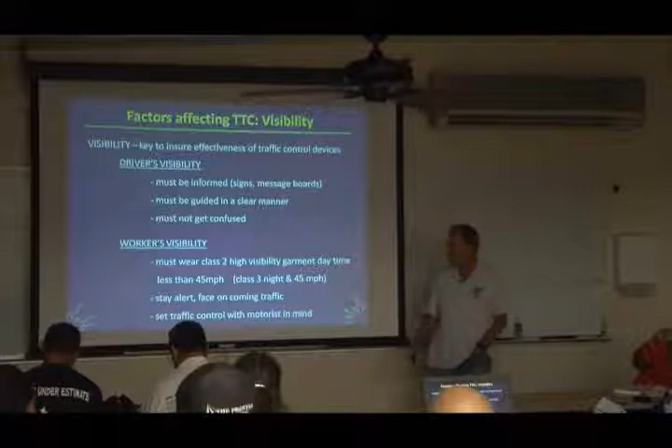Okay, you as the worker, keep yourself visible. Like we said before, you must wear a minimum of a Class 2 high visibility vest if you're working on the road in the daytime and it's under 45 miles per hour. Anything outside of that, working nighttime or where the speed limit is higher than 45, you need to wear a Class 3 vest. Basically that's just the amount of reflective material used to make the vest.

Stay alert, face oncoming traffic as much as possible. Now that's kind of hard to do - that's mostly when you set up the traffic control, but when you're actually working, what are you paying attention to, your work or the traffic? You've got to kind of look up, look down, but try to face oncoming traffic, especially when setting up cones and signs so you can see what's approaching you.

Try to set up the traffic control with the motorist in mind, meaning put things so that the unsuspecting motorist coming along would make sense of it - like where the signs are, you read it and have enough time to react. A lot of the traffic control we're dealing with is about giving the motorist the reaction time, the opportunity to see something, cycle the information through the brain, and make a determination.

For instance, why should a motorist slow down if you're only going to put one or two cones on the road? That doesn't look like high concern, yeah? But if you put a couple signs and several cones, maybe that commands their attention a little bit more. But where are you and what are you doing? We'll talk about that in a couple minutes.

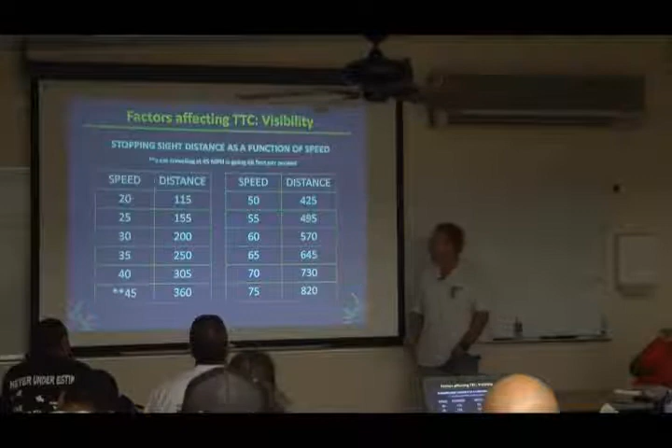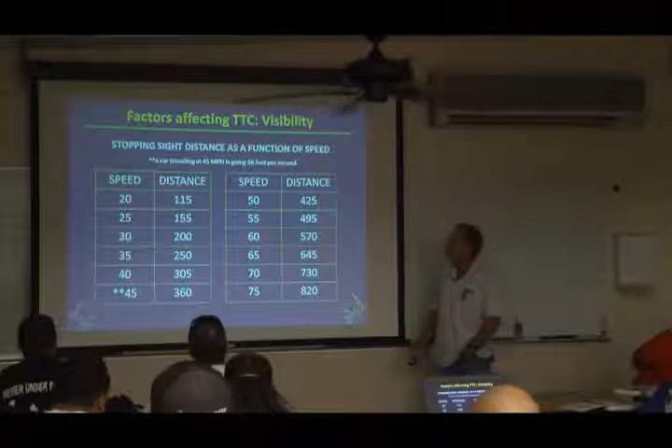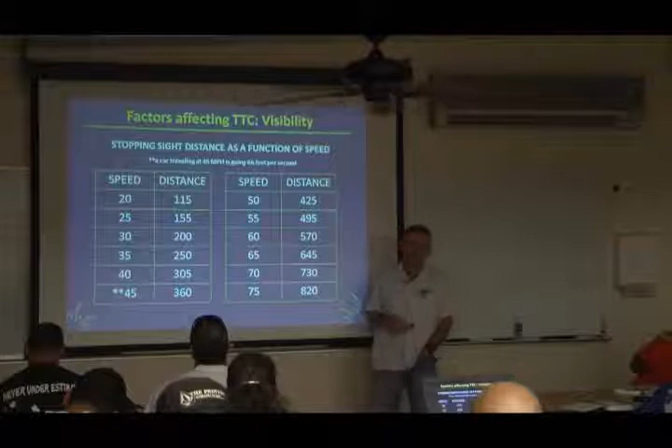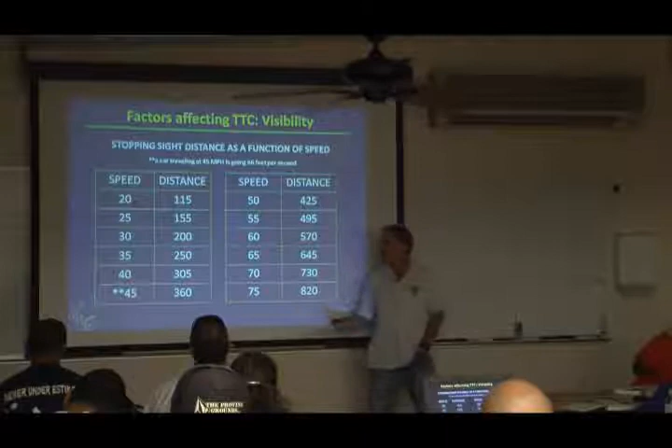Now as far as visibility goes, in the book there's the sight distance chart, and basically this tells you how much distance a motorist needs to see an object and react to it. Let's say, for instance, you're flagging. If you're a flagger on a road and you're in a 25-mile-per-hour work zone, between you and the motorist should be 155 feet of sight distance.

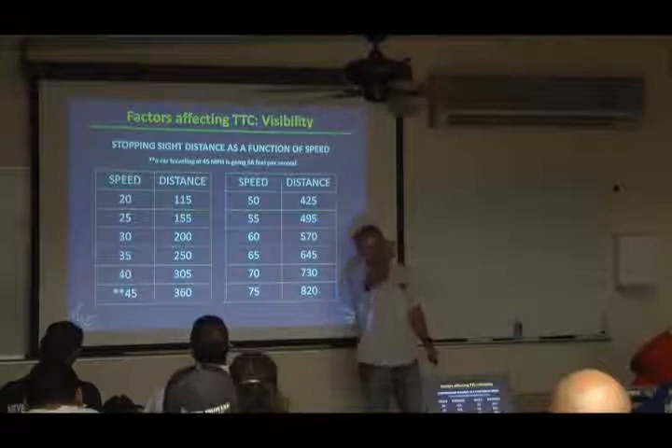So let's say you're in a 25-mile-per-hour zone, the motorists are driving along, and you're flagging, just as an example, and say you're on a curvy road. If you don't have at least 155 feet of sight distance with the car, chances are when you turn the stop/slow paddle to stop and tell the car to stop, they are not going to stop if you have less than 155 feet. So that's how speed and sight distance go hand in hand when working on the road.

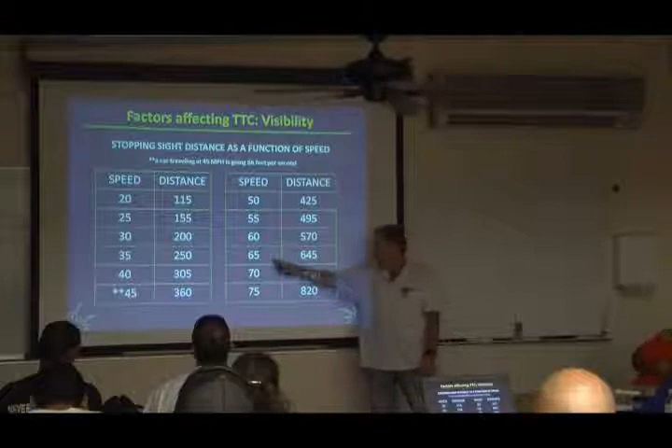We'll get to another chart pretty soon, it tells you how far to space the signs and so on. But as far as sight distance goes, even where you place the signs, the higher the speed, the further the distance needed. If they don't have the appropriate distance, they don't have the proper spacing, they don't see the signs, that sign is basically useless because the motorists can't read it. And if they can't read it, they're not going to pay attention to it. So basically, you're putting up a sign for nothing.

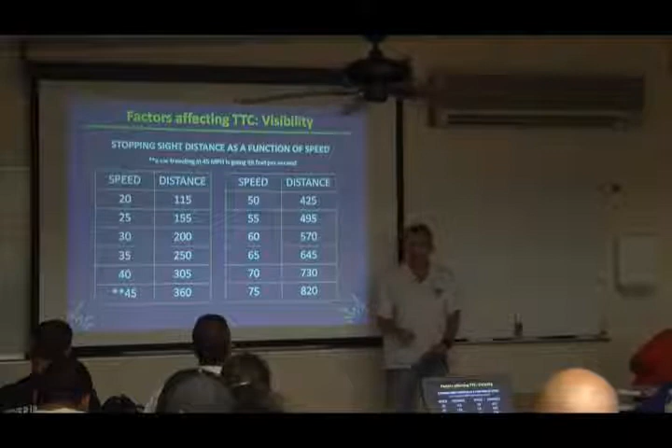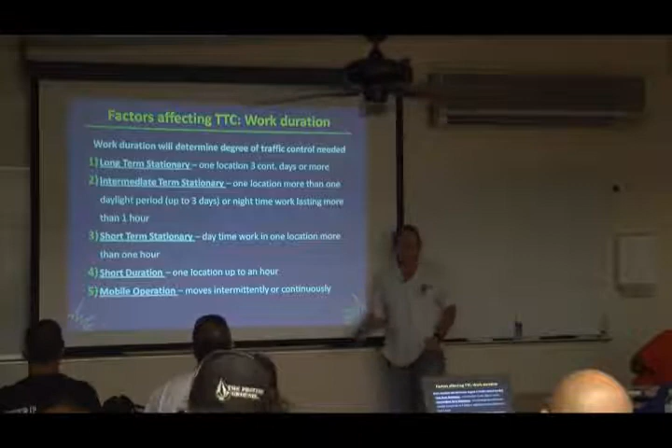Now I'll get into an example in a moment. This is kind of important what we talked about. Whether you're mowing and just shooting down the road, or let's say you're trimming a tree and you're going to be in one spot all day, cutting down a tree or whatever, you have different durations of work. And those durations of work will dictate how much traffic control you need to set up.

So the basic breakdown, there's 5 categories of duration. One is long-term stationary.

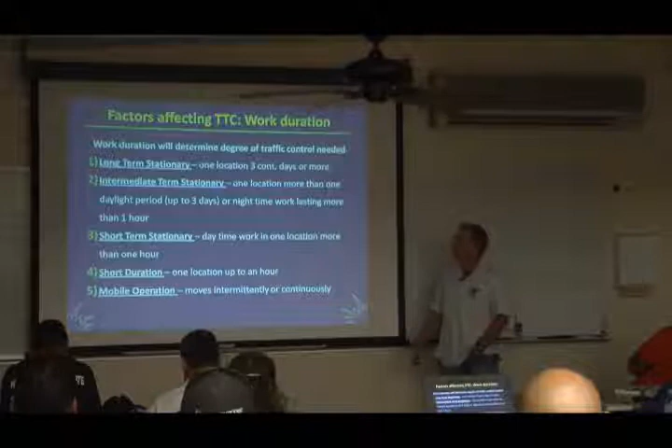This is the long-term stationary category, which involves full-on maintenance reconstruction projects where they stay in one location for 3 continuous days or more. We'll get into more examples of what each of these entail. The intermediate one is a location for more than one daylight period, up to 3 days. In other words, you go to the same spot every day for up to 3 days, or one nighttime period. A nighttime period is if you're out on the roadway at night for more than 1 hour, that would be considered intermediate stationary. I'll get to some examples of these as we go along.

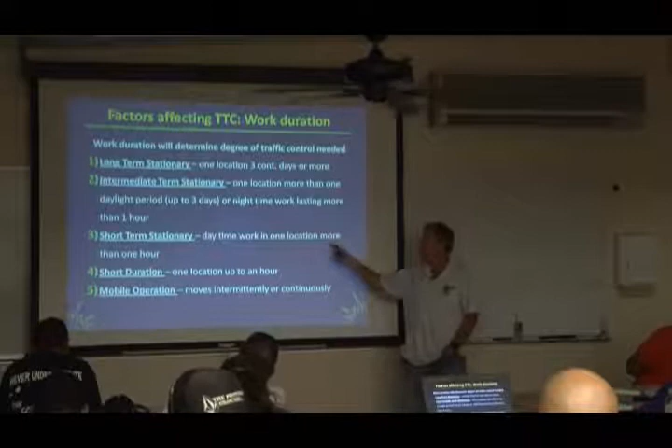Short-term stationary is the most common one. You work in one set location for more than an hour during the daytime. A short duration is in one location up to an hour, then you move. And mobile operation is just moving along.

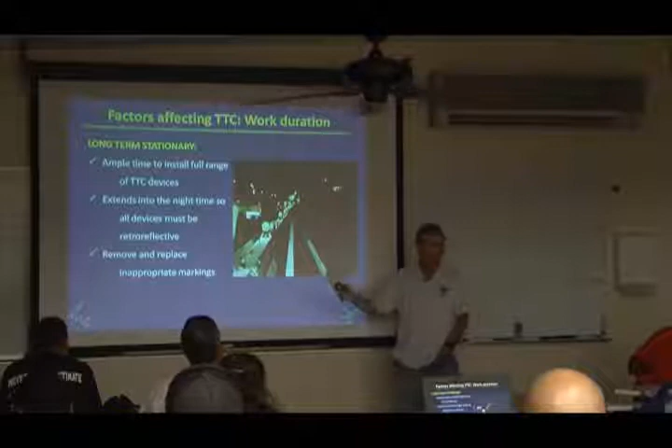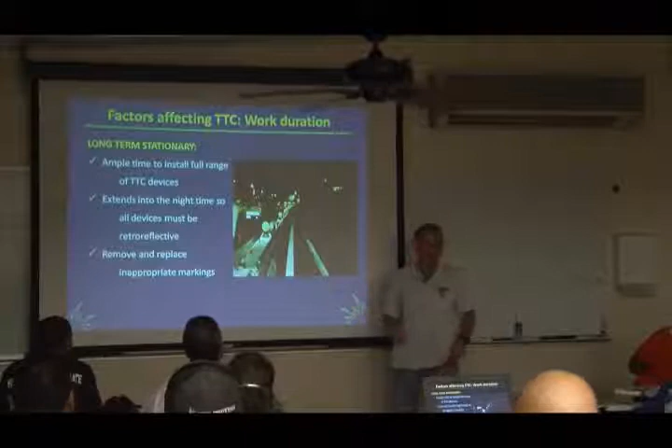On the long-term stationary, you know you're going to be there a long time, like I said, 3 continuous days. That's when you got to start setting up barriers, maybe do restriping, and everything has to be reflective. That's one of those that takes a couple days to set up because you're going to be there day and night, and you go through all that effort because you're going to basically reconfigure the roadway. If you're working in a location for a long-term duration, you need to go through more steps to protect the motorist. Long-term is when they set up everything, restripe, put up all the additional signs, everything.

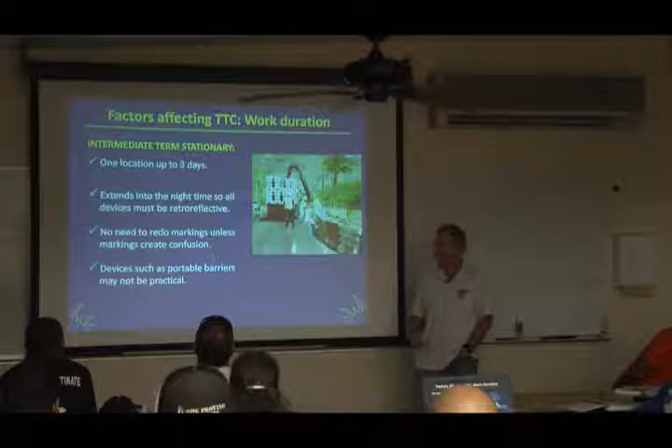Intermediate stationary, you're in one location up to 3 days. It might extend into the nighttime, so you want to make sure your devices are retroreflective - cones on your collars, signs with reflective sheeting. Typically you do not need to redo the striping, unless the motorists are confused or what you're setting up is going to conflict with the existing striping. But again, that's something an engineer would have to figure out. Pretty much that stuff you guys wouldn't have to figure out.

Devices such as portable barriers may not be practical. You're not going to go through this much effort to set up a work zone if you're just going to be there during the day and leave, come back tomorrow, and leave. If you're just going to work on the bridge rail a couple hours today and come back tomorrow, you're not going to go through the effort of blocking it off. But if you're going to completely remove the bridge rail and be there for a couple weeks to replace it entirely, then you're going to go through that extra work. So it depends on the work you're doing and how long you're going to be there.

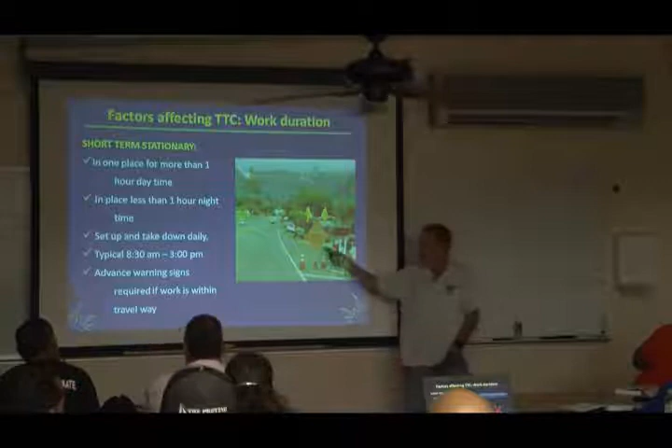This is probably the biggest problem I see with a lot of the maintenance type work. A lot of guys figure we're only going to be there a couple hours, so they don't put up adequate signs, they don't put up adequate cones. When you talk to a lot of people, guys like you and me, there's two reasons they don't put up the signs. A, they get sent out on the road to do something and they don't have the proper equipment. Or B, they haven't been trained and they don't know.

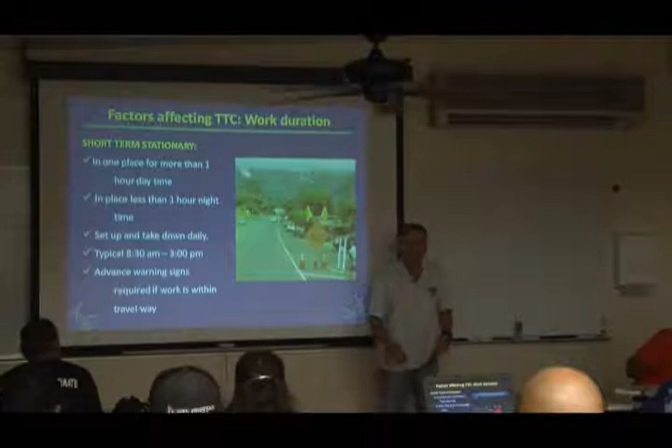So if you don't have the equipment, no matter what I tell you today, you pretty much can't set it up. This is where sometimes I get into trouble with supervisors, because I teach these classes and tell you guys, hey, you got to have these signs, you got to do this. You go back to work tomorrow and the boss tells you, hey bro, just go. Oh yeah, but the guy said...

You know, what are you going to do, right? That's where classes like this are put on, so hopefully everybody gets on the same page. The idea is for you guys to go home at the end of the day safe, come to work in the morning, do your job, go home with no problems. But that's where the conflict comes in, where you get told to go do something but you don't have the right equipment. Or you got the right equipment, but you figure, nah, we just hurry up then we go lunch. Kind of hard too, that way.

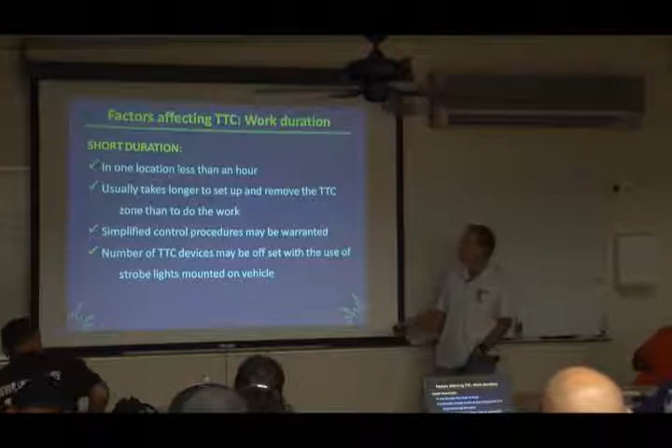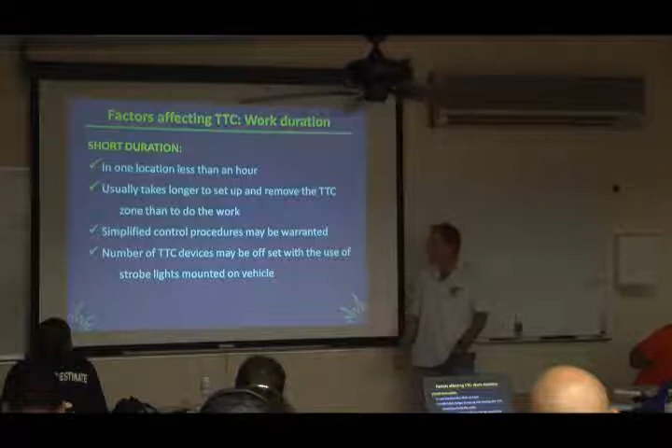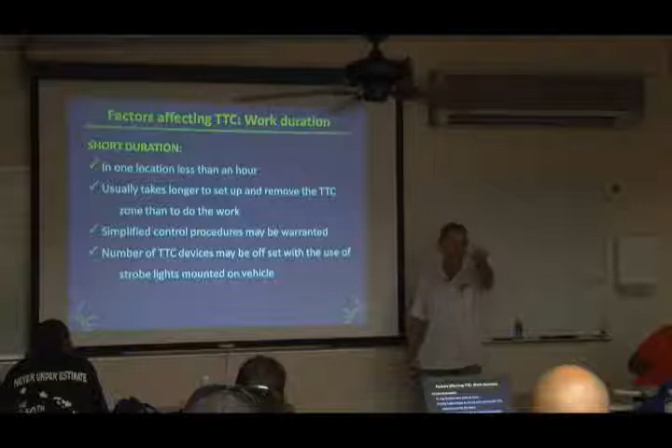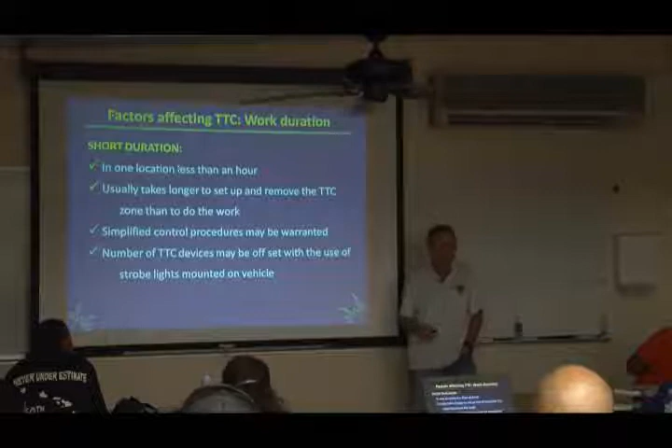Okay, so short duration: in one location, less than an hour. Sometimes it takes longer to set up the traffic control than it does to do the job. That's when you can simplify your procedures and the number of traffic control devices you need might be reduced. Like for instance, if you're doing lawn mowing on the side of the hill, you'll be in one spot, then you move down. Maybe you put up a simple road work ahead, shoulder work ahead sign, and just move along with a strobe light on the truck. Short duration, less than an hour in one spot, you just kind of move along, so that type of stuff is allowed. And again, it depends on how long you'll be there and visibility.

Because if the work is off to the side, basically you just want to give the motorist a heads up that something is there. A lot of accidents at work zones happen because motorists drive along and there's no signs to tell them. All of a sudden they're like, oh, what's up? And their attention is diverted.

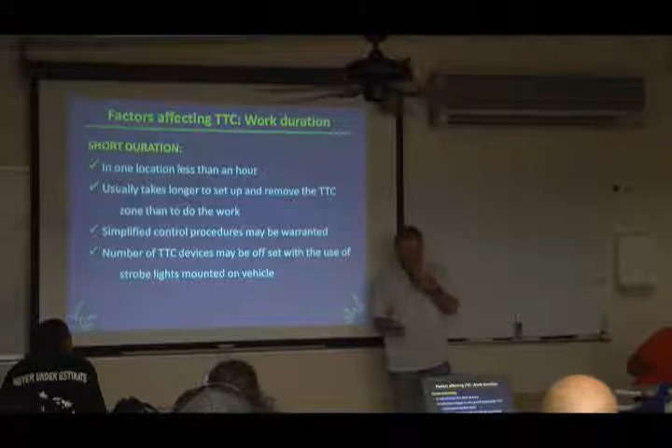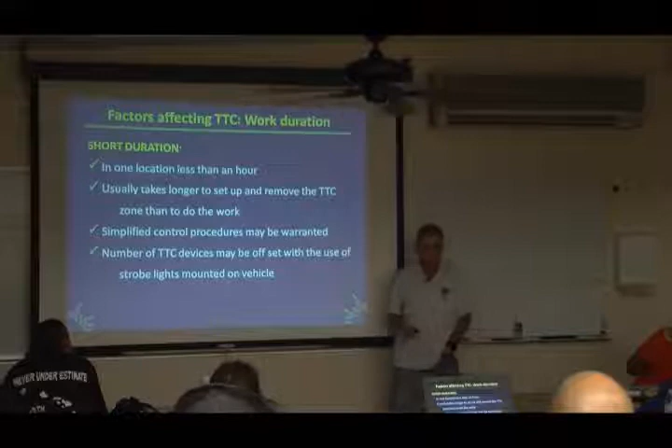What's another reason to put up signs, even if you're working on the shoulder, a little bit off to the side? Maybe pedestrians, bicyclists - it depends on where you are. If you're on, say, Kamehameha Highway instead of H1, you let them know, maybe they might want to think about going to the other side, keeping bicyclists or pedestrians safe. You got to think about where you are and who is affected by your traffic control. Remember I talked about the principles - we're not just concerned about motorists. If you're doing a weed whacker, do you want pedestrians walking right next to you? Well, maybe you do, but maybe you shouldn't, because they're going to get hit with flying debris. But is the pedestrian supposed to know that? Maybe not, you know.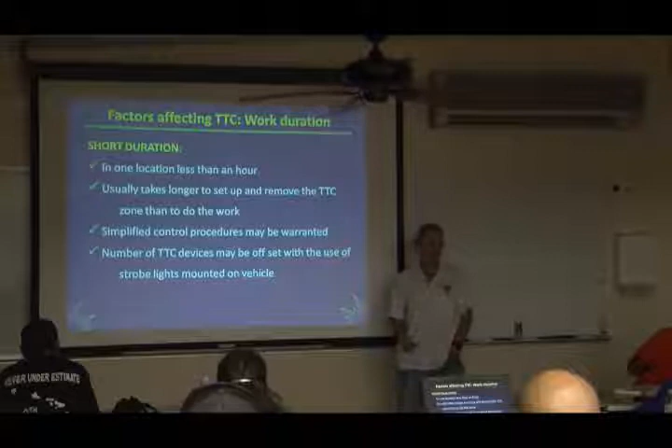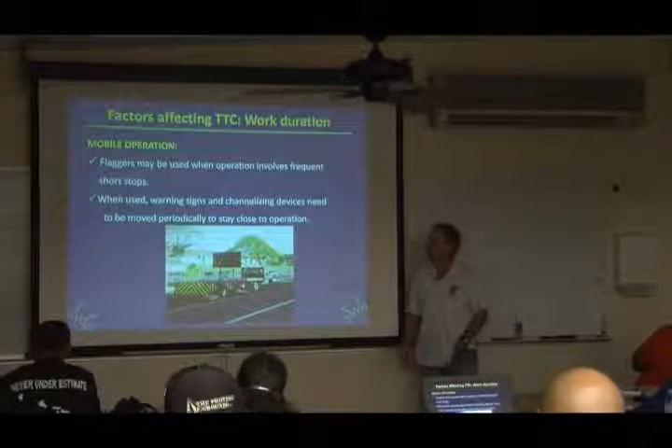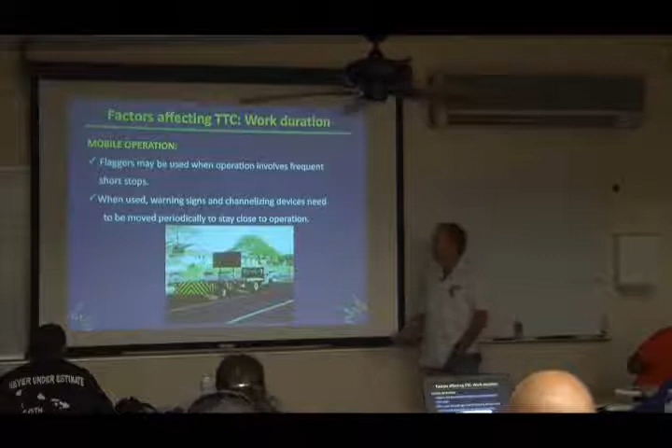Okay, and then finally, mobile operation. Flaggers can be used for mobile operations, provided they set up the proper advanced warning signs. Warning signs need to be relatively close to the work area if they are going to be used. And you cannot put up shoulder work ahead, road work ahead, start working here, and end up 8 miles down the road - those two signs back there mean nothing, really.

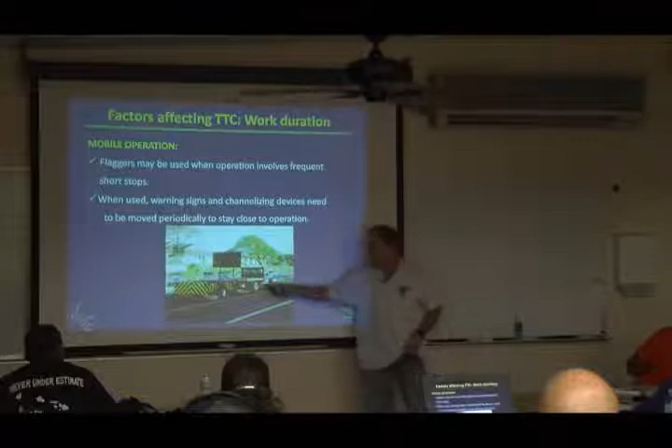But like for mobile operations, that's where we have this truck-mounted attenuator. We use stuff like this a lot for pothole patching. We just go down the road with the flashing arrow board on top, sometimes with a police escort. We use this on the freeway when they do pothole patching. If an automobile crashes into this truck, that attenuator will keep the driver from getting killed. That's a total mobile operation.

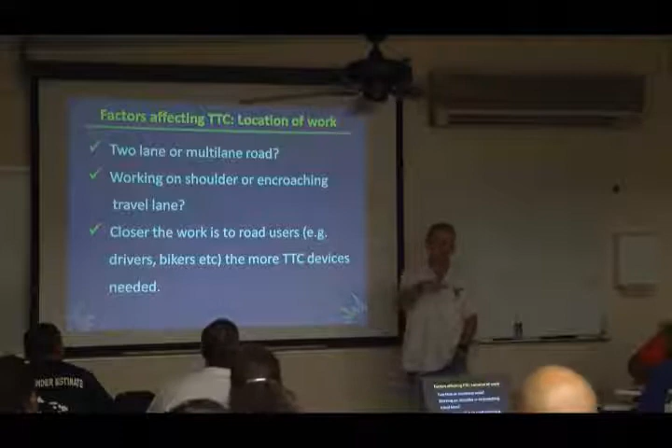Okay, so going back to the factors affecting traffic control: Is it a 2-lane road or a multi-lane road? Are you going to be working on the shoulder, or are you going to encroach into the travel lane? For sure, if you're going to go into the travel lane, like say you got to work on the right lane, for sure you're going to put up signs and cones.

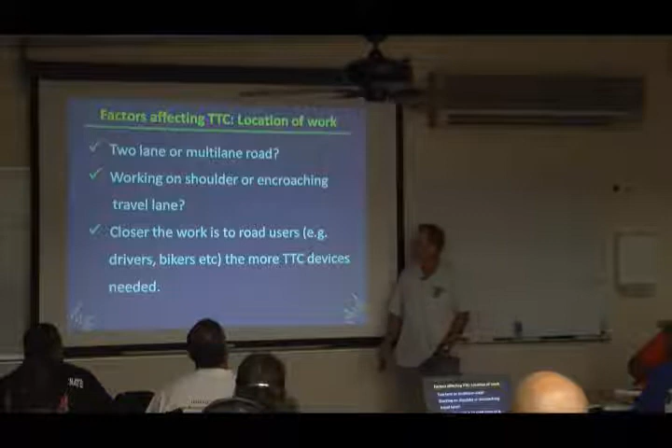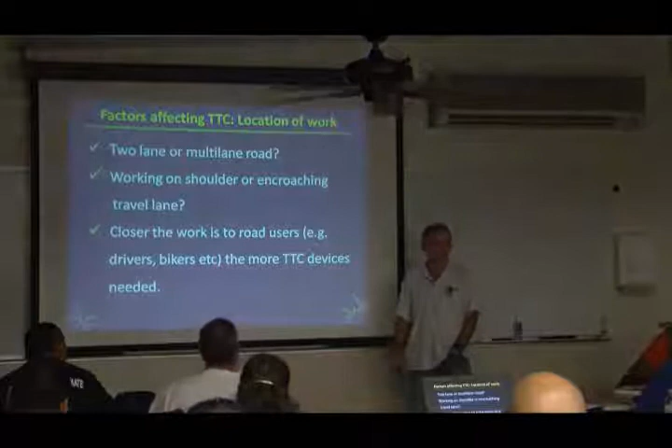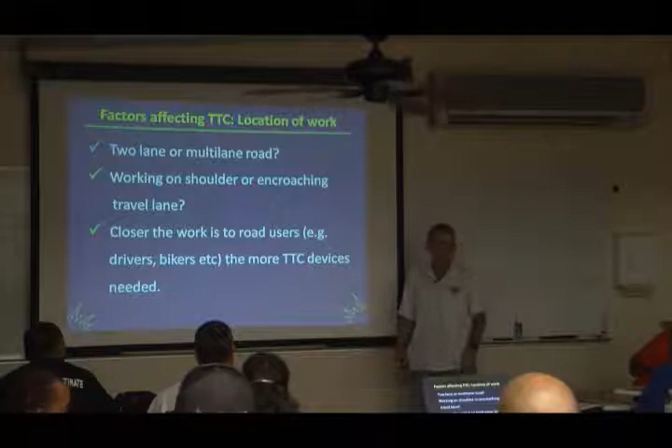But some guys, they don't. You'd be surprised - I've been doing this for 30 plus years, and I'm surprised there's not more people killed on the highway with their disregard for proper traffic control. Guys choose not to set up signs. They put 2 cones across the road and expect cars to be able to merge - they call that a taper. Speed limit 45, merging cars, no arrow board. I am totally shocked that there's not more deaths on the highway than there is now, because I see a lot of guys cut corners - good enough, no need, we're only gonna be here a short time. Hurry up, probably go. Or the boss sends you out and you don't have the stuff to do the job yet. But hopefully through classes like this, the word will get out.

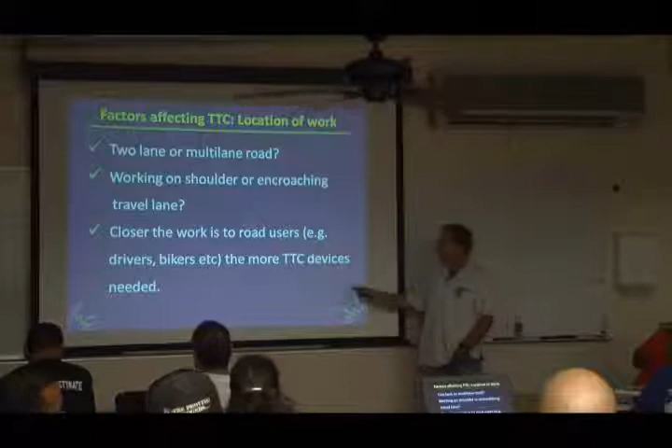The closer the work is to the road users, like bicyclists and pedestrians like we talked about, you should use more traffic control devices as well.

Okay, so what is a traffic control plan? Basically, it's anything that communicates to the people involved what you're going to do with the traffic control. There are a lot of typical diagrams, and this information is available in all sorts of places. A traffic control plan is something you can draw up. Like say your boss tells you, hey, you got to go work here. You guys talk about what you're going to do with traffic control. Draw something on a sheet of paper, make sure you understand what you're talking about, make sure you have the right equipment. You can share that with the crew and say, here's what we're going to do.

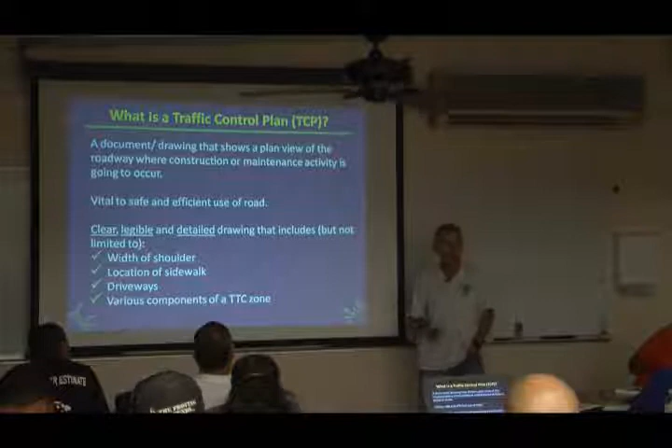Sometimes, and this may not really apply to you guys, when jobs go out to bid to contractors, the blueprints that come with the job have traffic control plans drawn, showing how the contractors are supposed to set up the traffic control. That would involve what signs are needed, what time they can work, where they can work, how many cones they have to set up. Very, very detailed, and that's drawn up by an engineer and approved through the bidding process.

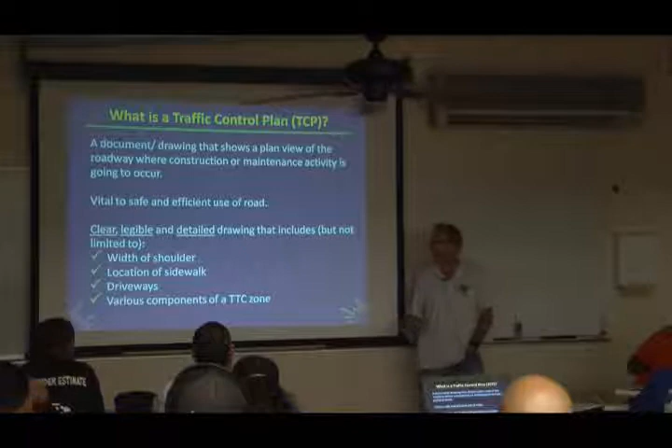Then you have the Manual on Uniform Traffic Control Devices. For state highways, when these jobs go out to bid, they also have the special provisions, and in the special provisions is Chapter 645, which talks specifically about traffic control. A lot of the information in this manual is based on that Section 645 of the special provisions of the DOT. So we took some of the information from the Manual on Uniform Traffic Control Devices, which is the federal manual, plus the better parts of Chapter 645, to make the information that's available in your book right now.

So when you have to draw a plan, you want to identify everything that is involved: understanding the width of the shoulder, locations of sidewalks, where driveways are, and what the different components of the traffic control are, where you're working, and why you need to block the lanes you do.

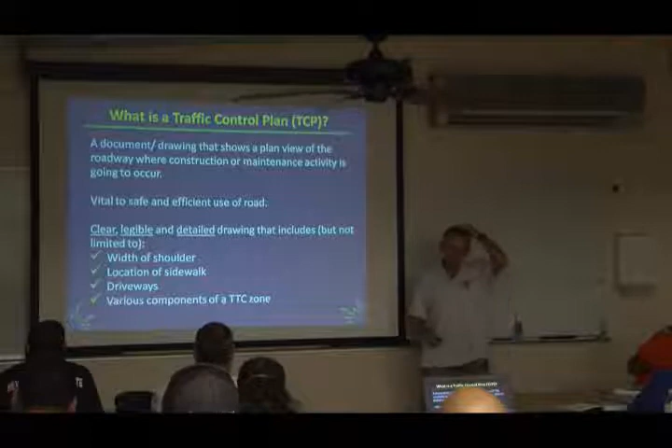One of the problems guys have when I put on these classes: if I tell you you're supposed to put up signs 250 feet apart, you go along and measure 250 feet. First sign goes here, 250 feet away from that there's a driveway. If it's 250 feet, do you have to put the sign in the middle of the driveway? Or do you have to put it before or after? Well, common sense is you're not going to put the sign in the driveway. But if you put it before the driveway, now you don't have 250 feet, right?

The reason I bring that up is, as we go through some of the charts coming up, it's going to give you specific information. For this speed, you must set the signs this far apart, boom, there's a number. All of that information, sign spacing, taper lengths, buffer spaces, cone spacing, that is guidance. That is not a hard set law that cannot be deviated from. Traffic control is a very complex thing.

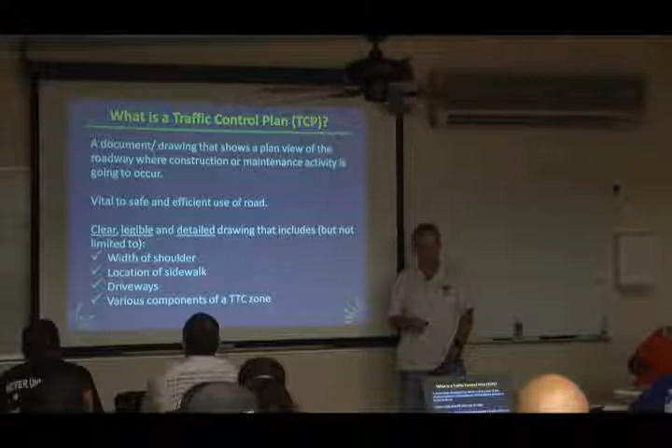You were negligent in your duty to put up the amount of cones that was required. So there may not be a law that requires you to put the cones 25 feet apart, but through the guidance, you should put the cones 25 feet apart so that you're not negligent.

That's a subject we can talk about for a couple hours, but I want to bring to your attention that when you're out there working on the road, as a responsible individual, part of your duty is to keep the motorist safe, to keep the pedestrian safe, to keep your work crew safe, and to keep yourself safe. And that's by following the guidance that is given to you.

Now, if you're asked, why didn't you put the cones 25 feet apart? And you say, well, in that area we put them 30 feet apart so our truck could pull out. Is that reasonable? Yeah, kind of makes sense, right? Maybe the cones were too tight to let the truck pull out, so you guys left a 30-foot gap instead of 25 feet. Good judgment, reasonable. People can understand that.

At least you have a reason why you did it. Versus saying, oh, we put them further apart because we didn't have enough cones. That's negligent, versus doing something like going back to my 250-foot spacing with the signs.

Why didn't you put the sign 250 feet away? Well, because I was in the middle of the driveway, so we put it on the other side of the driveway, and now the sign was 260 feet instead of 250. Is that reasonable? Yeah, that's reasonable, right? So there's a lot of flexibility in how you look at traffic control.

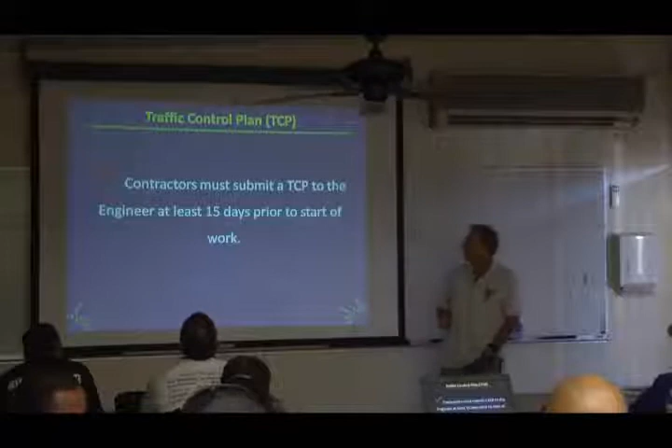For you guys, the workers, yeah - you go out there, you look where you're going to work, and you guys decide how best to control the traffic where you're going to work. On site, you make your own plan. You guys are not contractors.

Okay, I'm going to try to speed this up. I know you guys are getting bored, yeah? But this is good stuff, and you guys should try and understand this. Basically, in any traffic control, there are 5 components.

You have your buffer space as part of your activity area, your buffer space and your workspace. The buffer space, that's a dead area with nothing in there, used as a recovery area for vehicles that just don't quite merge and need a place to go so they don't crash. So that's the area before the work actually starts, where if the motorist doesn't quite merge properly, they can pull in and stop before banging into something.

The workspace, that's where everything happens, from your first piece of equipment to your last piece of equipment, or where you're working. And then, of course, your termination area, your termination taper, will let the motorists get back to their normal path. No matter what you're doing - flagging, closing one lane on the highway, two lanes - these 5 components will always be there.

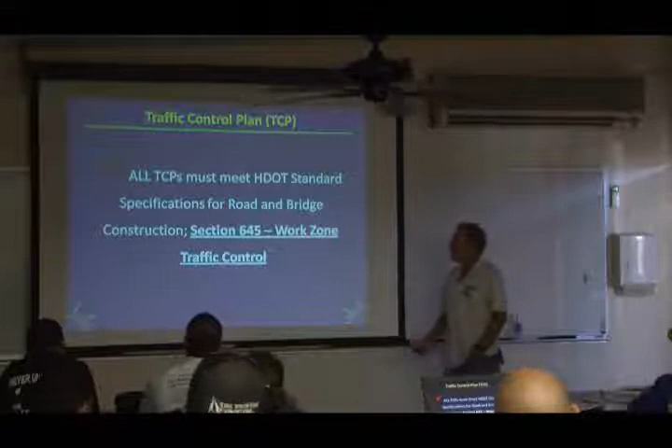All traffic control plans must meet the DOT standards, basically that's the 645.

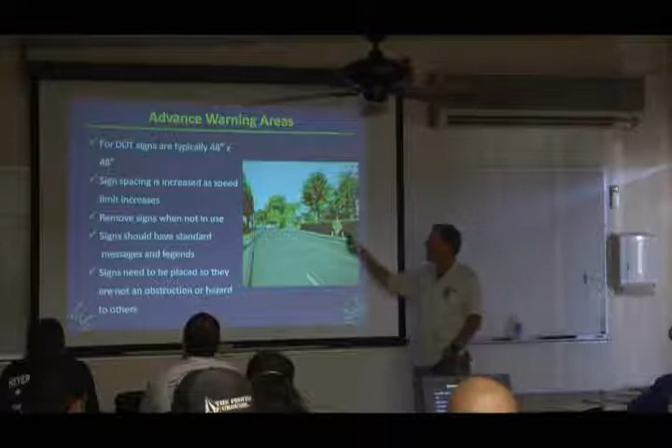Talking about advanced warning areas, typically we use 48 by 48 signs. A lot of times my company will use 36 by 36 inch signs when we work in residential areas, downtown, Waikiki, congested areas where there's not much space to put signs, we'll use a smaller sign. Typically you guys will use the 48 by 48 inch signs.

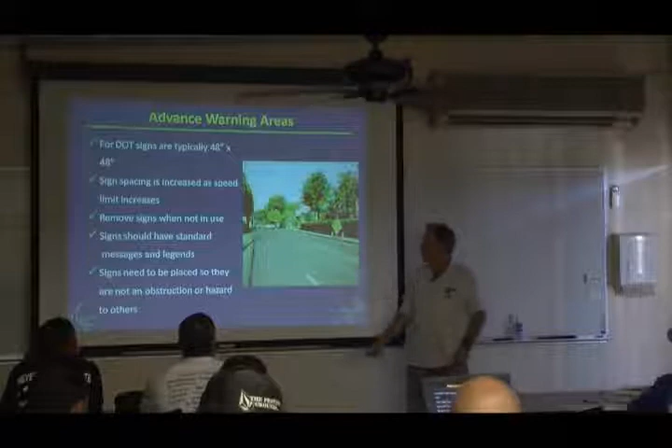Obviously, and when we get to the chart you'll see it, the sign spacing will increase as the speed limit goes up. For 25 miles per hour, a couple hundred feet apart. If we're on H1 freeway, signs that close would be totally useless, it'd just be a blur. Roadwork, something else, bye - you know.

Remove signs when not in use. Why is that a good idea?

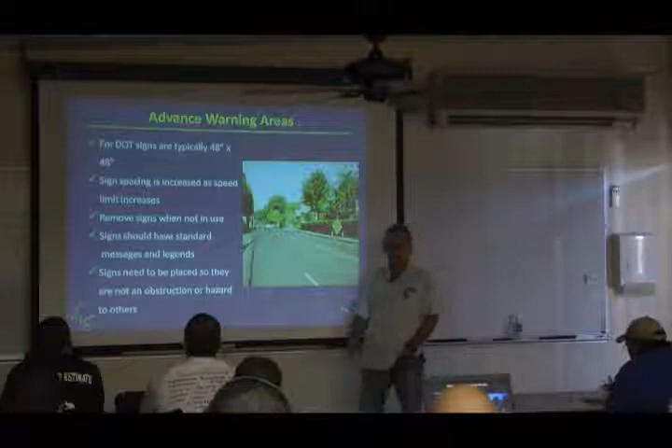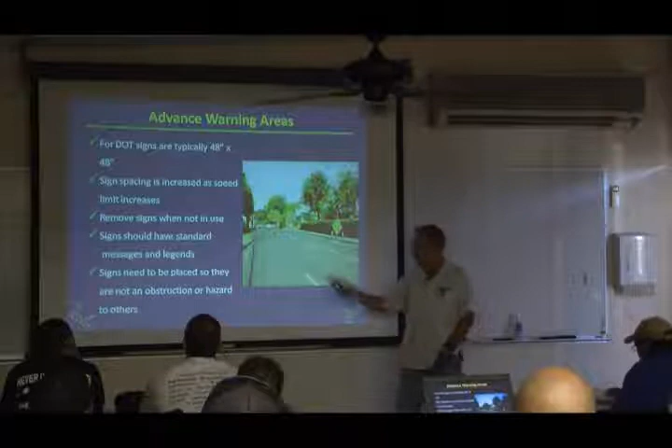You don't want to confuse the drivers, you don't want to give them false information. You know the story about the boy who cried wolf? People see signs up all day long, every day, and nobody working. Eventually the signs mean nothing, right? And that happens a lot. That's why motorists sometimes ignore signs - they see it, nobody working, the sign will mean nothing. We don't want to train motorists to ignore signs. So just put them up, use them. When you're done, take them down. And the signs need to be placed so they are not an obstruction or a hazard to others.

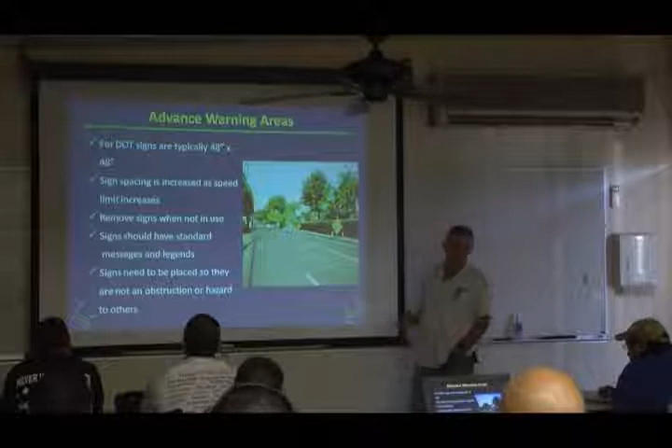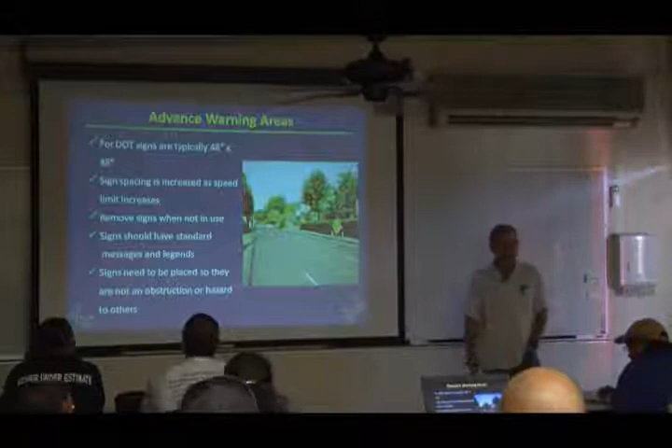That's why I chose this slide. What is the potential problem with that sign where it's sitting right now? Pedestrians, yeah? If you're a pedestrian, where are you going to walk? In the road. Is that a good idea? Not really.

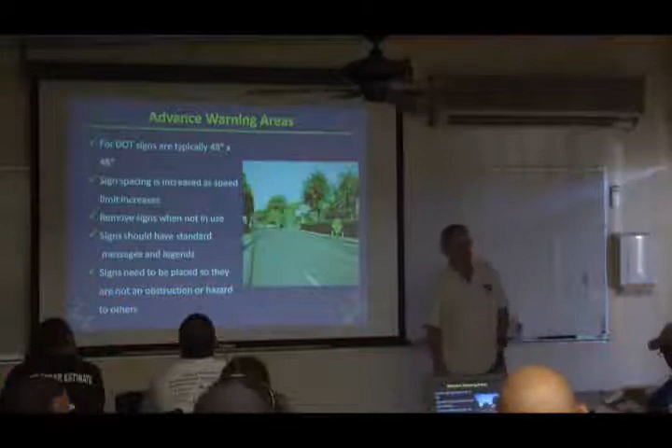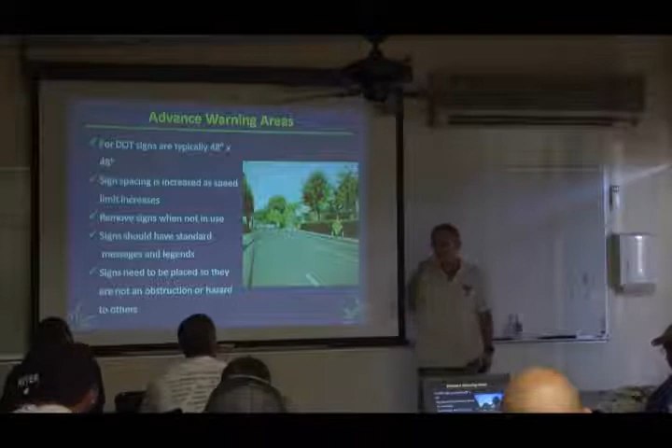So that's some of the stuff you're going to encounter when you're out doing traffic control - where am I going to put the signs? Like in Maui, we had a job on Hana Highway, and we had to put all the signs on the makai side because that section we were working, it was a cliff, road, guardrail, small shoulder, then more cliff. There was no way we're going to put signs on the right side of the road, on the mauka side. So we put all the signs for traffic heading out on the opposite side because that was the only place to put the signs. Our choice was put them on the opposite side or put nothing.

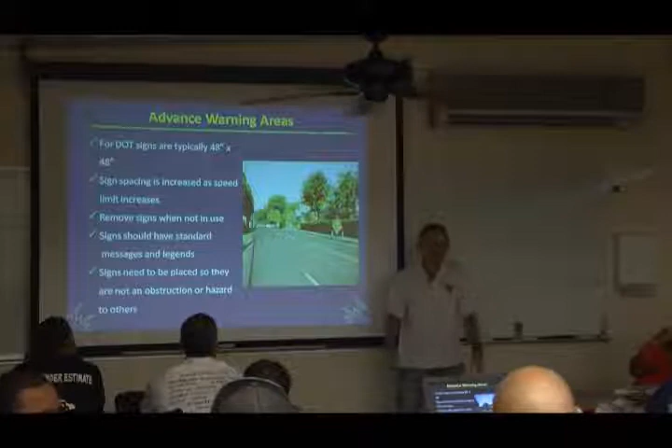We had to do what we had to do, and you're going to face that all the time. How did it work out? Nobody died. Fortunately, on that highway it's about 15 feet wide, cars are doing 15 miles an hour. That's in the worst area where only 2 cars cannot pass at the same time. So it wasn't too bad.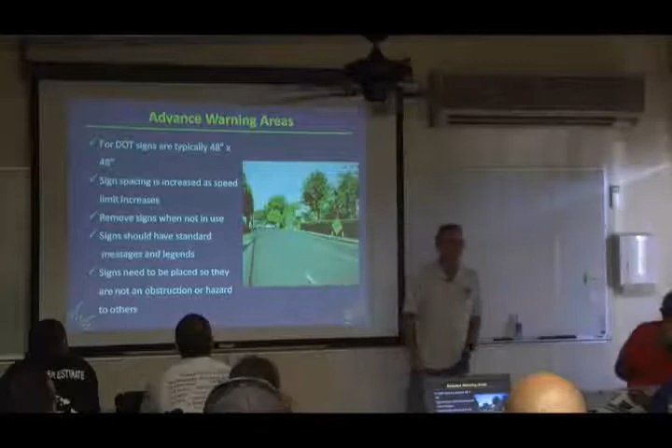So in this situation, what would you do? You're going to have to do like we did and just hope for the best with the pedestrians. Because what's your biggest concern, the pedestrians or the motorists? There's more motorists that pass. If this was a high pedestrian way, they'd probably have a paved walkway for the pedestrians, maybe a cement sidewalk or something. But with 1 or 2 pedestrians, hopefully they're smart enough to figure it out. But this is the kind of stuff you're going to be faced with a lot.

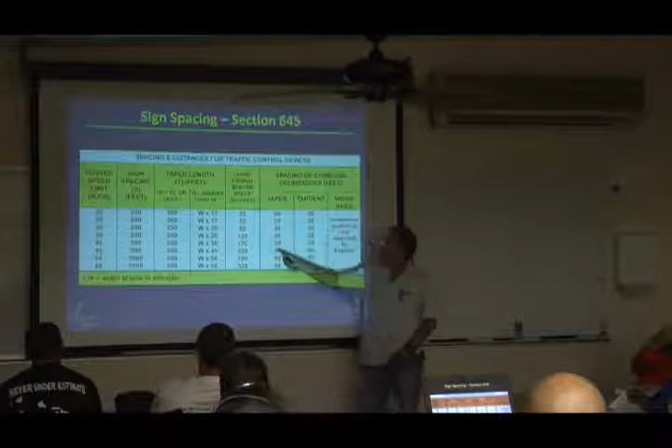And as you can see, the tapers get longer, the buffer space gets longer, the channelizing devices get longer, the spacer gets wider. But as far as sign spacing, this is your basic information.

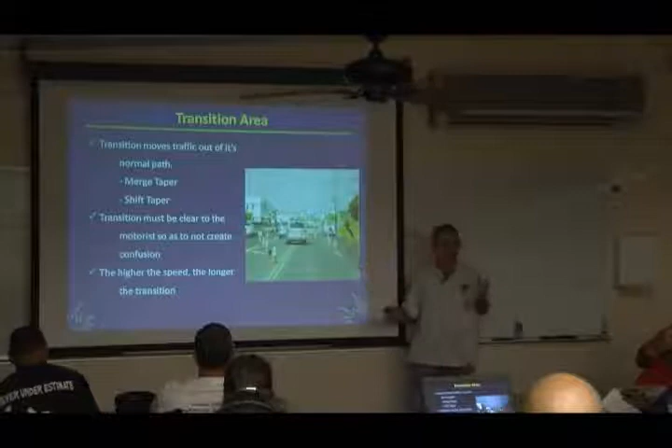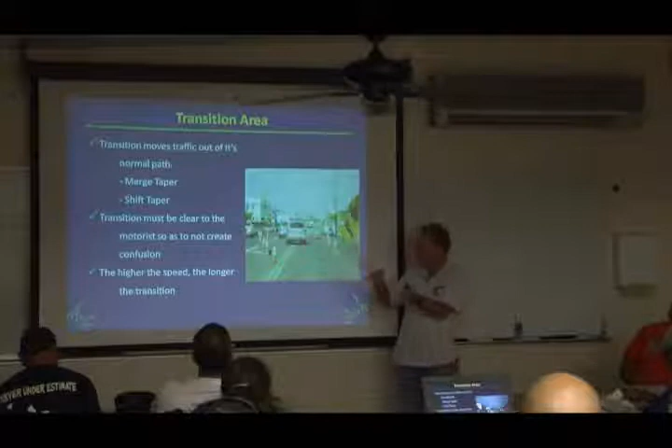Now, we talked earlier about don't set up traffic controls that are confusing. When you start shifting traffic around and you have driveways and multi-directional areas with intersections and stuff, it can get confusing - sometimes motorists get a little confused. You got a sign right here, then this little taper right here that's shifting cars over. This is a transition, basically you're shifting cars over. The reason this looks like this is because right behind this sign you have a driveway, and going up further ahead you've got an intersection. So traffic control can be confusing depending on what you're doing.

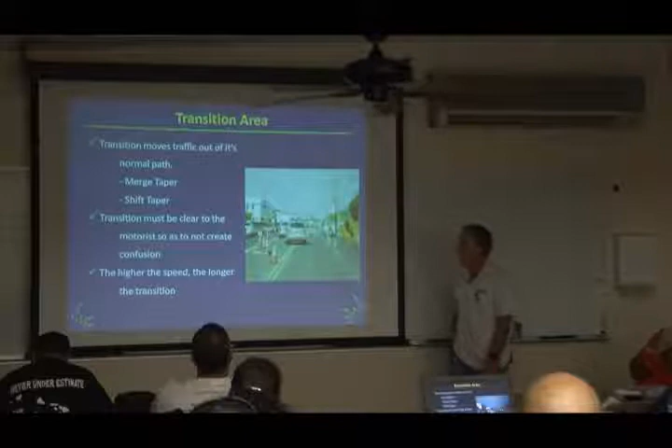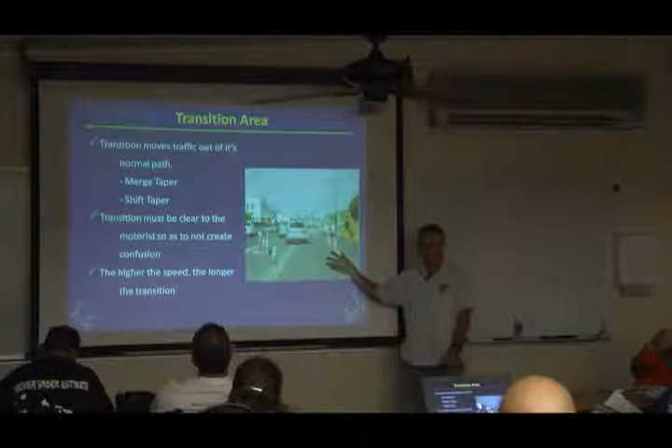You try to make it as clear as possible. Again, because this is in a slow speed area, 25 miles an hour, these tapers look relatively short. But you can tell we've already merged the traffic over from the right lane into the left lane, and now we're just pushing them onto the opposite side of the road.

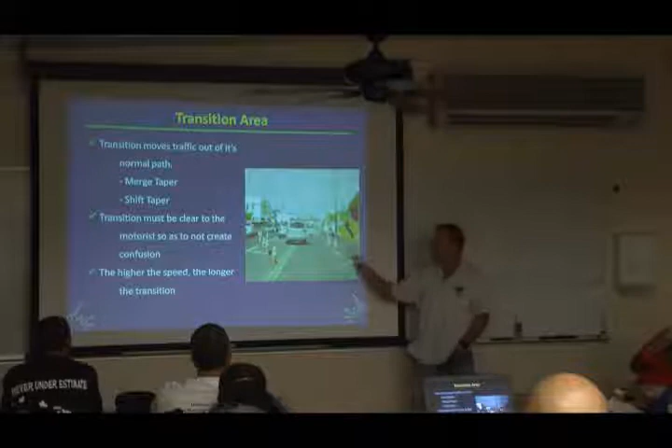So they're already down to a single lane, they're already kind of slow, now we're just guiding them along. But when you do traffic control in areas that have multi-direction driveways and stuff, it does get a little confusing. Like I said earlier, you try to set it up from the driver's perspective. When you set this up, try to think about how the drivers are going to negotiate through that traffic control. And if you're really confused, call GP Roadway, we'll come set it up for you.

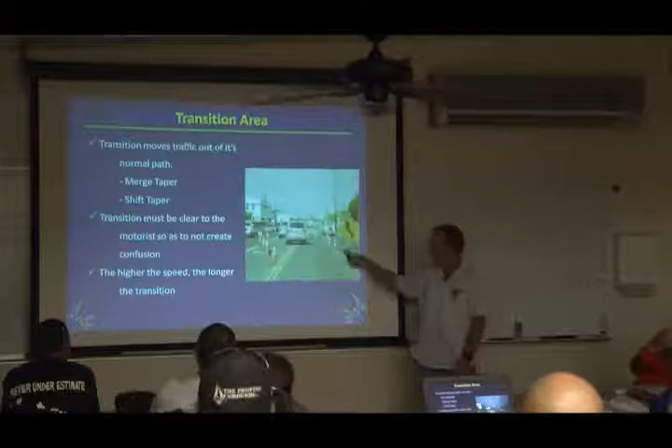So the opposite of short taper is long taper. When you set up, this is Likelike Highway, Kaneohe bound. This was a tree trimming project, they're cutting down the trees that were hanging over. Can you see the work crew? No, the work crew is not in this picture. The work crew is way down here. So why did we set up the traffic control right here?

Better visibility for the motorists. They came up, they're at the top of a hill, they're coming down. They're able to see this from a good distance, well before the work area, nice long straight taper. We did it, the work crew is working behind, around the curve. We did not want to set up the taper at the curve. And because this road kind of has that one riser, flattens out and rises again, this is the flattest, straightest area. So we set it up right there. But you can see 45 miles per hour, 500-foot taper.

Clear, visible. Now this is one of the things you got to think about too when you set up your traffic control. Even though the crew is working around here, not even in the picture, we set up the traffic control back here so that for the motorist, they could see it clearly, merge over, and then get to where the work crew is actually working. So sometimes when you think about your traffic control, you have to look beyond 'this is working here, so let's put the cones right here.' Sometimes you got to think from the motorist's perspective, where's the best place to put it, the most visibility that will give us the safest transition. So that's what we did in this picture.

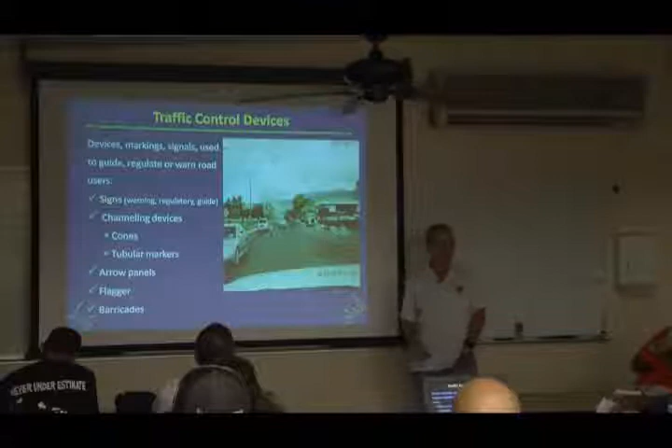Okay, so talking about traffic control devices: delineators, arrow boards, message boards, barricades, cones, all that stuff. Everything is a traffic control device. Even the flagman when he's flagging, that's a traffic control device. It's just a matter of how you use them.

So traffic control devices should fulfill a need. There's got to be a reason why you put it out there. You cannot just put stuff for whatever. They need to command attention, meaning the motorist has got to be able to see it, read it, understand it. If your orange and black sign is no longer orange, how many of you guys have seen those kind of pinkish signs that are like 20 years old already and half the letters are scraped off? You know what the sign says, but the motorists cannot read it. Motorists are going to ignore that because they can't read it.

It's got to convey a clear and simple message: right lane closed ahead, road work ahead, shoulder closed ahead. Real simple, clear messages. You guys ever drive down and see some signs spray painted by the contractor that say stuff you can't really understand? Yeah, homemade is good sometimes, but not when you're doing traffic control. You want the motorists to be able to see it, recognize it. You guys see an orange sign when you're going down the road, what does that tell you automatically? Road construction. Orange signs mean construction.

To command the respect of the road users, it's got to look good, be presentable. And when you set up traffic control and put the devices out, you got to make sure they're set up so that you give the motorists the proper amount of time they need to respond how you want them to. In other words, put the right sign in the right place with enough spacing so they can merge, slow down, stop, change lanes, whatever. But it's all got to be part of the planning process: what signs do we need, what are we going to do, how are we going to put it out there.

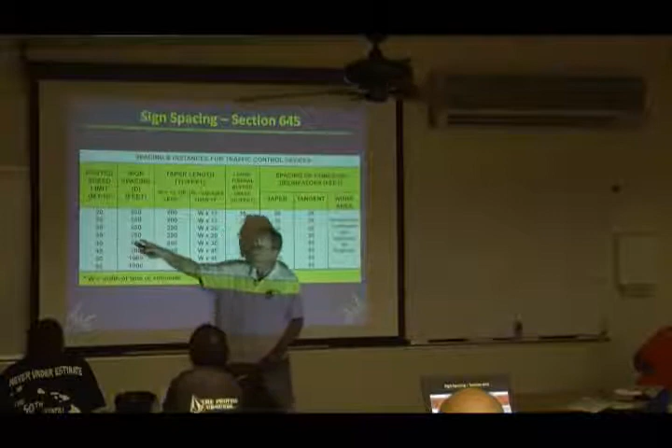Okay, and again, here's that chart. So you can see, like we were talking about, 35 miles per hour—you're going to space your signs 250 feet apart, you're going to have a 120-foot buffer, and your cone spacing is 35 feet for 35 miles per hour. Pretty simple, yeah?

Simple, yeah? Please say yes. Okay, if you fell asleep, raise your hand. Oh, two guys. Oh my God. All right, so in the book they got some typical diagrams.

Working on a shoulder—if you're actually working on the shoulder, you're going to put more advanced warning signs and actually cone it off, because you're working there doing physical work right there and you don't want motorists to... Now, why would you go through the process of putting a taper on the shoulder?

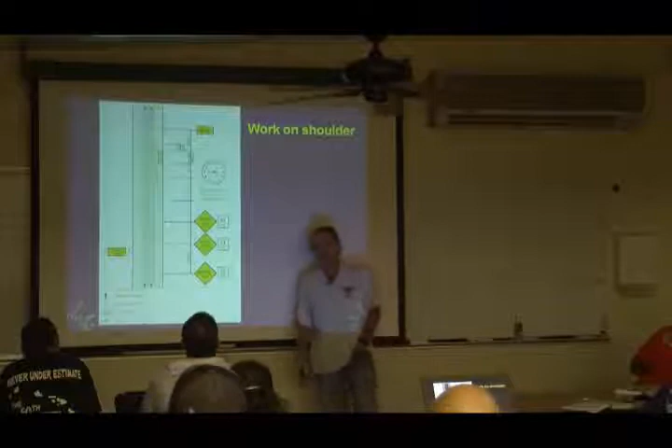If somebody has an emergency, say a flat tire, you want them, if they pull over, to see that they cannot go straight. You want to guide—that's what tapers do, they guide motorists away from an area. If you just put a couple cones straight across, would that be the same? Not really. So even though you're not in the travel lane, you still want to guide the motorist away from your area. That's why you set up a taper on the shoulder, even though it's not an area where cars are going to be merging or pushed out of their travelway. Again, you got to think about how the motorists see it—they come up, and you want to make sure they're guided away from where you're working.

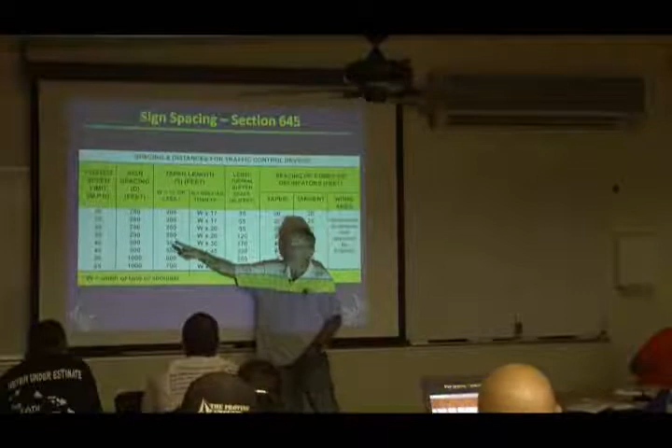Okay, now when we talk about taper lengths, let me go back a couple slides. Say your speed limit is 35 miles per hour. You're going to space your signs 250 feet, and your taper is going to be 250 feet. That's the part that guides the motorists out of the travelway. You guys with me on that? Taper guides the motorists out.

Moving back to this slide, on the shoulder you see where it says 1/3T? That stands for 1/3 the length of the taper. So if the regular merging taper was 250 feet, on the shoulder, 1/3 of 250 feet is about 83 feet, so say 85 feet. Because people don't drive on the shoulder, this taper only has to be 1/3 the length, or 85 feet. The reason I'm pointing that out is because that's going to be one question on your quiz.

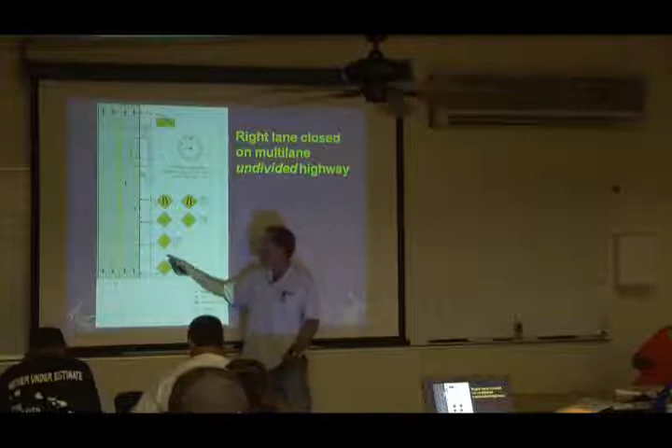Okay, right lane on a multi-lane road. So you have basic road work ahead, road work right lane, merge symbol, arrow board, taper. If this speed limit was 35 miles an hour, how long would the taper be? 250 feet - we just talked about that 2 minutes ago. Again, who fell asleep? No.

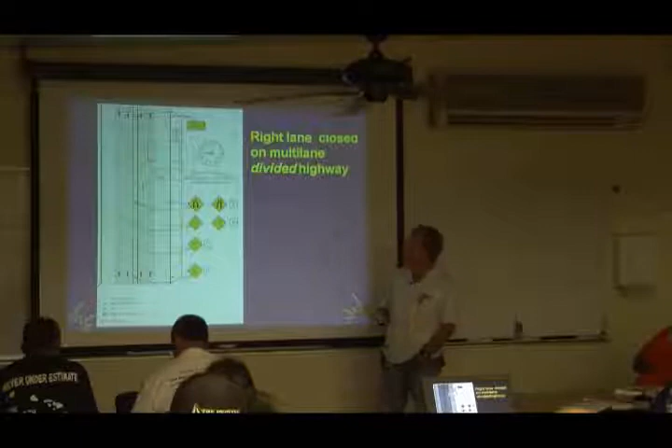What I'm going to do is pass out this sheet of paper. On this sheet of paper there is a drawing which has some instructions on it - a couple for you guys. Now read the instructions and we'll go over it. I'm going to have you guys draw your own traffic control plan. This is an open book thing, so hopefully you guys got - if I give you extra, don't throw the extra one at me, yeah?

1, 2, 3. I got enough here. 1, 2. Hey, did everybody get one? Let me know if I didn't count correctly. Remember the part I told you I'm not very smart? This is where it comes in, right here. Okay, everybody got one?